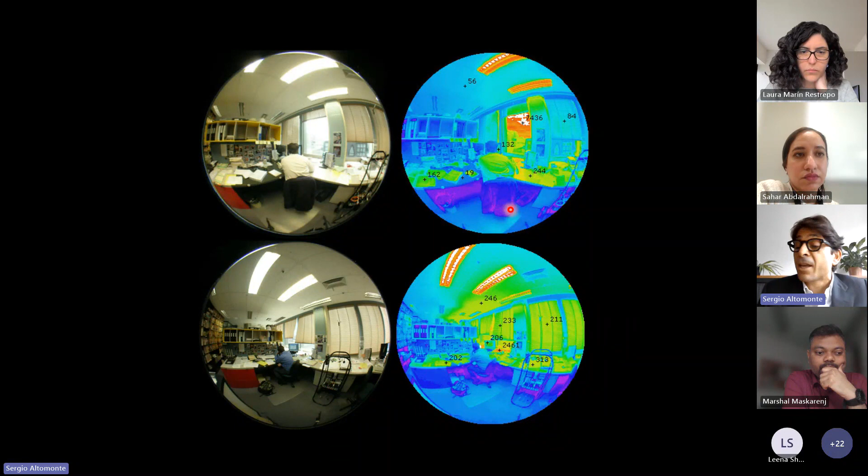So this would contradict all of our models of glare and understanding of potential risks of disability or discomfort. Why is this happening? What is the interaction that is currently in place between the person and the environment that, in a way, is starting to dispute the correctness of our models? So this is a bit of the premise that I want to give to this talk. And later on, I will maybe reveal to you what is happening here and why we think that this phenomenon takes place.

First of all, as I said before, most of us, and I'm sure most of the people attending the lecture today, for years have been discussing the energy versus human nexus. So energy consumption in buildings and how people can actually achieve comfort in buildings while still keeping an eye on their energy consumption. We're obviously stating the obvious here. We know that buildings use 40% of the energy of the whole energy package. This information comes from the US DOE in 2011, but it could actually be more recent data, because the percentages are still found to this very day almost everywhere in the world.

The question that we should actually ask ourselves: are buildings actually using energy, or is energy used by people in order to achieve and retrieve or maintain their condition of comfort, satisfaction, health, and well-being? Actually, a publication from Janda of 2011, the same year of this infographic, says buildings don't use energy, people do. So the question that we should ask is why people use that energy and how those four different levels of human experience, comfort, satisfaction, health, and well-being, can effectively be maintained.

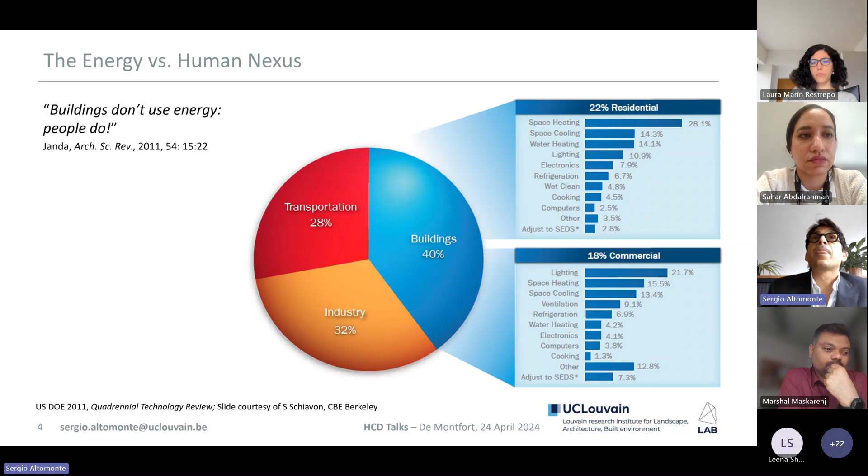So in the field of our research, we often talk about indoor environmental qualities. And indoor environmental quality, based on the US Institute of Occupational Safety and Health, is the quality of a building's environment in relation to the health and well-being of those who occupy the space within it. Essentially, if we look at the general building layout, the acoustic quality, the air quality, the maintenance, thermal comfort, lighting, and so forth, we should be able to control the conditions present inside the building in order to guarantee what? The comfort, satisfaction, health, and well-being of people.

And for this, we have a number of standards resulting from a number of different research endeavors from everywhere in the world. But is it actually happening? If we keep indoor environmental qualities responding to the requirements of the standards, can we guarantee the health and the well-being of people inside spaces?

Actually, recent research, and I'm here referring to the Indoor Generation research by Velux, tells a bit of the contrary. If we look at what staying indoors actually implies today, we have significant evidence that tells us that staying indoors is not at all actually healthy. And this is due to a number of reasons, but also due to the fact that people differ in needs, preferences, behaviors, scenarios, and situations, while standards tend to be somehow regulated based on mean distributions.

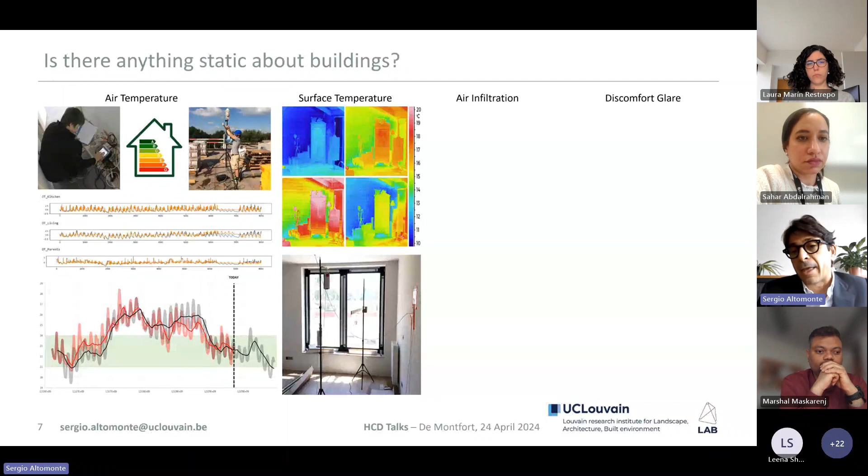Most often in research, we refer to buildings in a rather static way. We look at the buildings and we look at the number of factors that intervene within the building. But is there anything static about buildings? If we look, for example, at fluctuations in air temperature, or at differences in surface temperature that, for example, could come due to sudden presence of sun irradiation on a window, or at the phenomenon of air infiltration due to differences in pressures or to wind presence, or, for example, at the phenomenon of discomfort glare, to which I was referring at the beginning of this presentation, we can definitely see that there is nothing static about buildings.

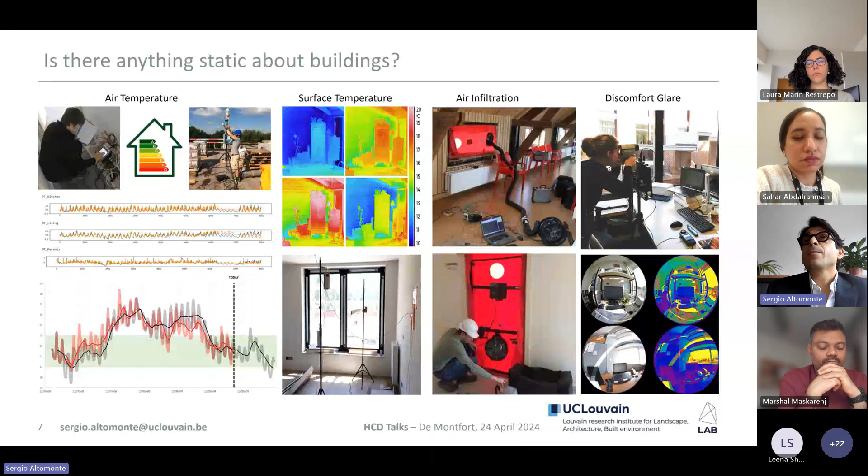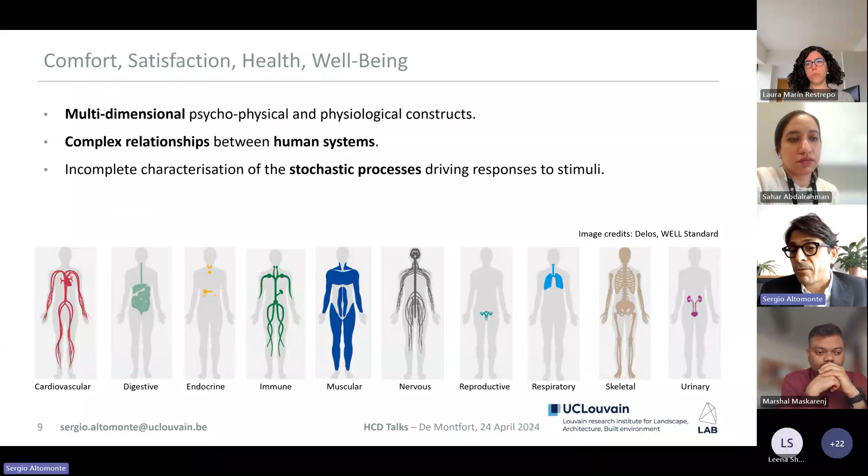In order to address comfort, satisfaction, health, and well-being, we have to disentangle the complex relationship between different human systems, but also accept the fact that we still have incomplete characterization of the stochastic processes that drive response to environmental stimuli. So this is a bit of the questioning that we have been asking ourselves for, I would say, the last 10 years. And I've had the chance of working with a number of scholars of international level in this first publication that we did in 2020. This was done just before the outburst of the COVID-19 pandemic, where we started questioning what is well-being in the built environment. From all this work, a number of hypotheses were formulated.

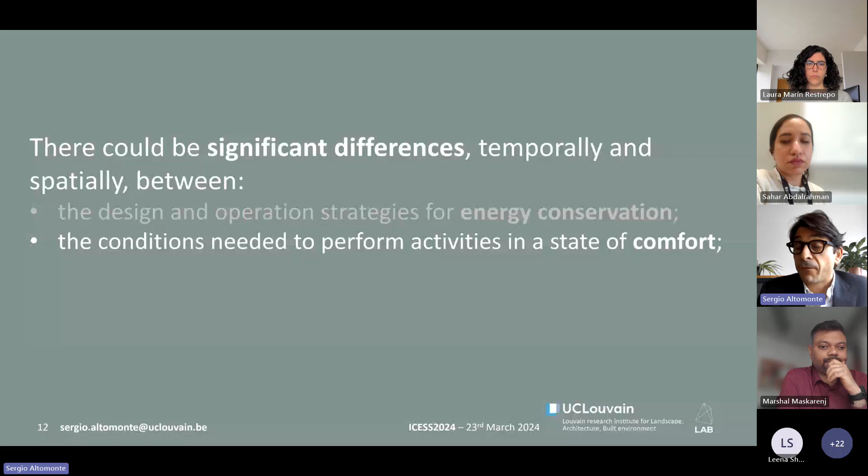First of all, the hypothesis that we try to address in our research is that there could be significant differences at the temporal and spatial scale between the design and operation strategies for energy conservation, so the energy issue in buildings, the conditions that are needed to perform activities in a state of comfort, what contributes to satisfaction with the indoor environment, what occupants need to be healthy, and the settings that are conducive to feeling well over time.

Essentially, this hypothesis means that the strategies that we utilize at building and room level in order to save energy may sometimes be in contradiction with the strategies that we would put in place in order to achieve comfort, to guarantee satisfaction with the environment, to look after the health of people, and to make them feel well. On the other hand, another hypothesis that we put forward in our research is that various environmental stimuli may interact or compete at different spatiotemporal resolutions to affect perception and outcomes of comfort, satisfaction, health, and well-being, driving user responses and environmental behaviors.

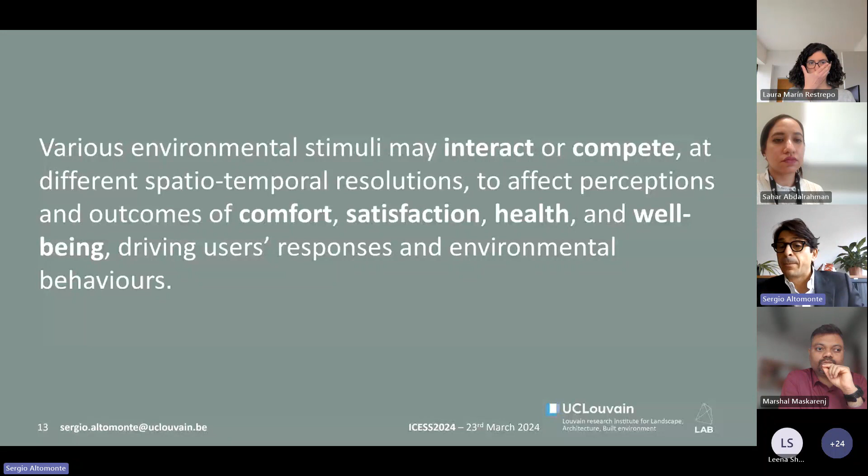In our research, we tend to be somehow secluded in silos. We have specialists in thermal environment, specialists in lighting, specialists in acoustics, but it's not that often that we look at the synergistic or antagonistic combination of those stimuli. Well, actually, if we look at the way in which we experience buildings, multiple sensory modalities that encode the properties of an environment are not processed independently, but actually interact with each other. We may not perceive the thermal environment at the same time as the visual environment, since our brain may actually dissect those experiences, but the sensation comes at the same time.

So the sensations, which are a relatively straightforward activity of the sensory system, are interacting with each other. It is then our brain that perceives, in a process that involves the person, the mind, and experience, and then moves on to the following step of cognition in order to enhance decision and judgment. So this is also a process that we need to look at particularly carefully from a neural level, in the way in which our behavior is driven by the interpretation that we give to the multisensory modalities to which we are exposed. And in this, we reiterate what we said before.

People are all different, and people are different from each other, in this case, inter-individual differences, but are also different from themselves. I may have a different perception with respect to the same sensation at different times of the day, or in different seasons, or in different conditions.

So there comes the understanding that in an office building, particularly if it is, like in this case, an open space or a shared space, people will always and ineluctably have different opinions in terms of their perception of the environment. We said we're looking at comfort, satisfaction, health, and well-being, and I'm sure that everybody, if asked, could give a very clear definition of what they conceive as comfort, satisfaction, health, and well-being, very often referring to standards. But if we look at the definition given by standards, even in this case, we can find some a bit weird contradictions. So, for example, if we ask what is comfort and what is satisfaction, and what is the difference between comfort and satisfaction?

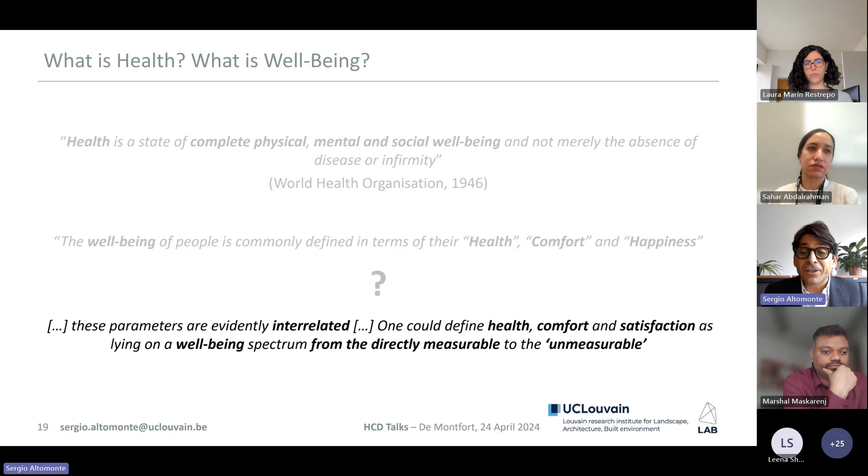These are the questions that we asked ourselves when starting to elaborate a conceptual model that could somehow try to disentangle the intricate connotations of these four constructs. A paper was published recently in Building and Environment that I co-authored with Seda Kaçel, that I mentioned at the beginning of this presentation, Paulina Wegertseder Martinez and Dusan Licina from the EPFL, and it's called, as the title of this presentation, What is Next? A New Conceptual Model for Comfort, Satisfaction, Well-being in Buildings.

But already we're putting ourselves in a specific moment in time, and we are feeling something that changes the way in which we perceive the environment around us. So we can say that the transient and subjective evaluation of the momentarily resolved perception deriving from the multisensory integration of concurrent environmental exposure be defined as comfort.

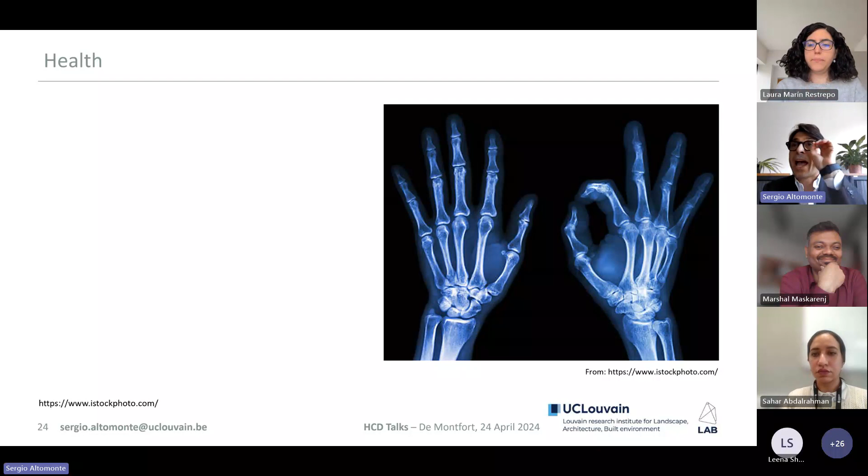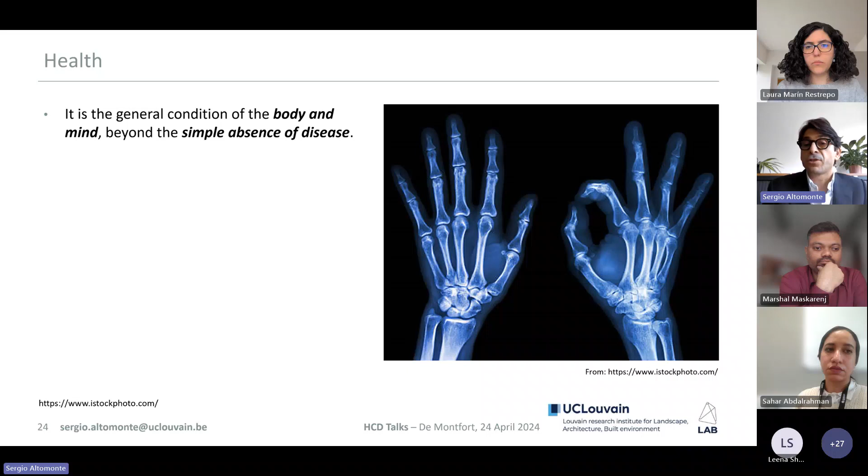Let's look at this, X-rays. So in this case, obviously, we have a picture, a snapshot of the state of health of a person, but it's a general condition of the body and the mind that is beyond the simple absence of disease. So it's something that may go back to the history of exposures. It entails optimal functioning of the body, so it's not only a physical state, but also peace of mind, confidence, and social connection. It's dynamic and it's temporary.

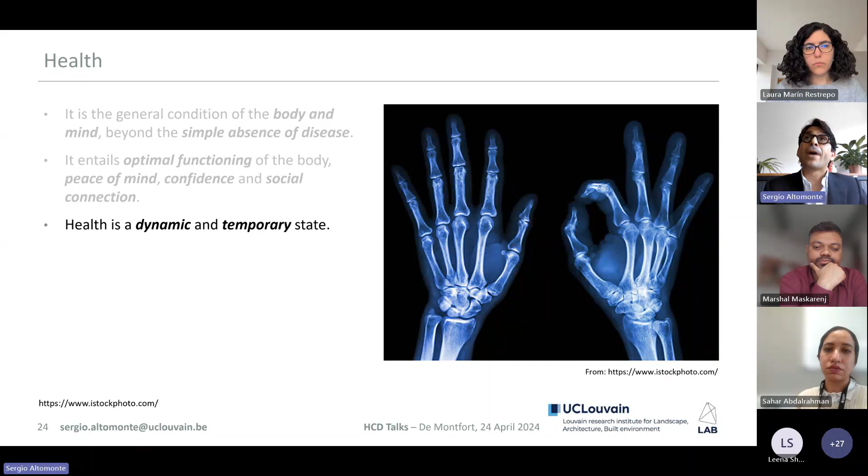The X-ray is taken now, so obviously it may change in the future, but still it looks like something that takes into account all of my history of previous exposure. It is to be evaluated in a transient moment in time and space, right here and right now, but the breadth of experience that influences my state of health is obviously much broader than what characterizes comfort.

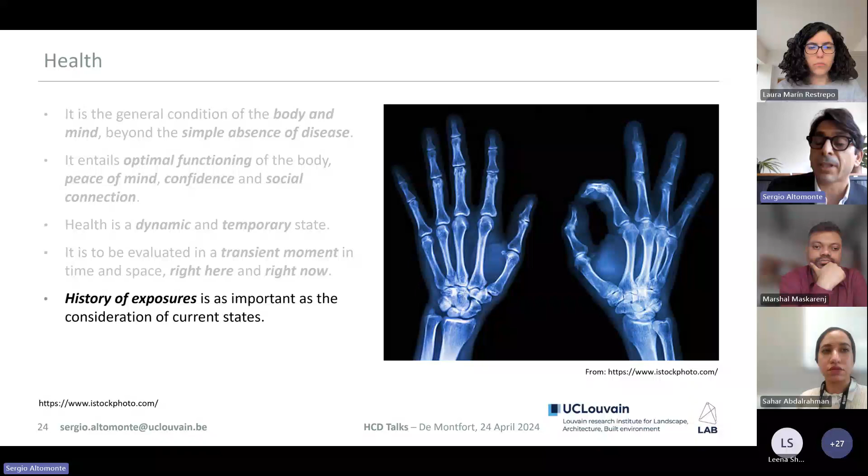It implies health and comfort, as Stevens had said in the definition, but also is projected towards quality of life. It's multidimensional. It is physical, functional, social, and mental, but also it entails a combination of flourishing and thriving. It entails moods and it entails emotion. Well-being is something that encompasses satisfaction with life, happiness and pleasant affect, but something that is sustained over time.

So even if comfort, satisfaction, health, and well-being are very often used almost interchangeably in research and practice, they imply different constructs. And we have tried to put them together in a graphical format with this model that we called NEXT. So why NEXT, first of all? Well, if we look at the number of dimensions, we can call this N. If we look at the experience and expectations of people, we could call them EX. And if we look at the dimension of time, we could call it T. So the combination of N, EX, and T gives us the NEXT model.

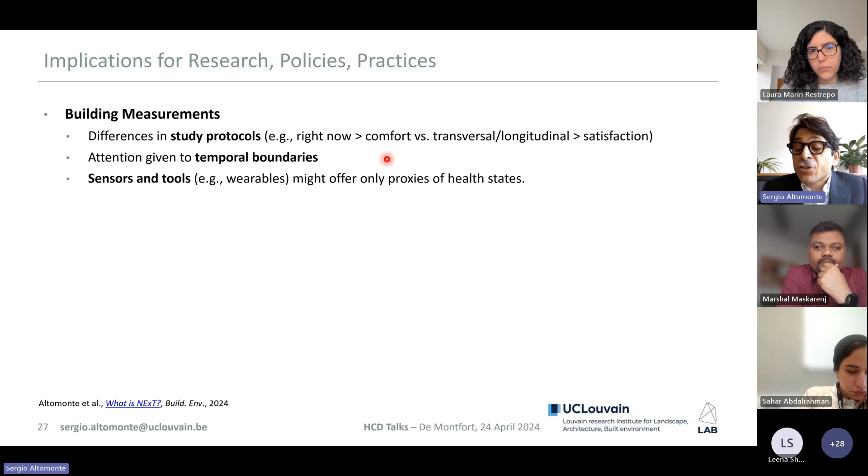So this is the model that we put forward, and we anticipate that it could have significant impacts in terms of building measurements. So, for example, difference in study protocols: you would measure comfort with right here, right now surveys, while rather satisfaction with a transversal or longitudinal survey. We have to give attention to temporal boundaries. What are we asking of people? And of course, we may need to include sensors and tools to measure the different states that can be referred to the different constructs. There's also a difference that this model may have in benchmarking.

So building strategies need to be less prescriptive and allow for adaptability, depending on whether we want to prioritize comfort, satisfaction, health, and well-being, but also we have to address the diversity of building users and types and functions of buildings. We have to encompass different spatio-temporal resolutions, and we have to allow dynamic fluctuations in the way in which we contextualize the experience of buildings.

Also, design criteria may need to radically change. I'm stating this with a lot of caution, but comfort may not be a prerequisite of satisfaction and health. Actually, in some cases, a slight deviance from comfort, so a slight discomfort, may be more beneficial to satisfaction and health than staying within the boundaries that are set by standards. A temporary drift from the comfort zone, as has been said already several times in the scientific literature, may actually be satisfactory and may be healthy.

We may actually induce a stimulus to our body that may be healthy for our endocrinal production, for example. On the other hand, if we focus on dynamic and variable human outcomes, so if we let our buildings drift outside of narrow zones of control, we may also induce very significant energy savings. So I would stop here. I just wanted to give a very general overview of the way in which we deal with the construct of comfort, satisfaction, health, and well-being.

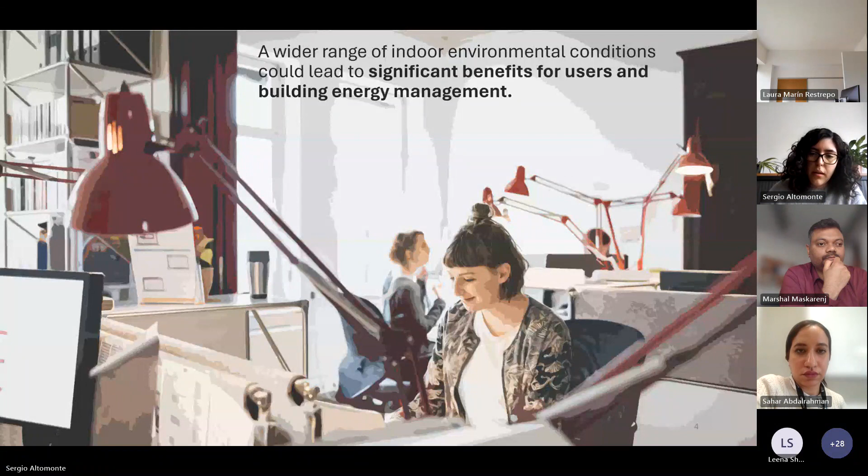So this research is part of my ongoing postdoctoral project, investigating the relationship between human comfort, environmental conditions, and social dynamics to redefine these traditional indoor environmental standards with an occupant-centric approach. So today I will share this conceptual framework about tolerance and how individuals perceive and respond, and how we are developing this research. And by examining these aspects, we aim to offer some insights that challenge and extend this traditional way that we

saw the standards. So let's first explore a bit the concept of tolerance, which refers to the extent to which individuals can endure uncomfortable conditions before feeling compelled to take an action. And this tolerance is not just about the physical sensation of discomfort, but also involves psychological and social dimensions that affect our behavior in shared spaces.

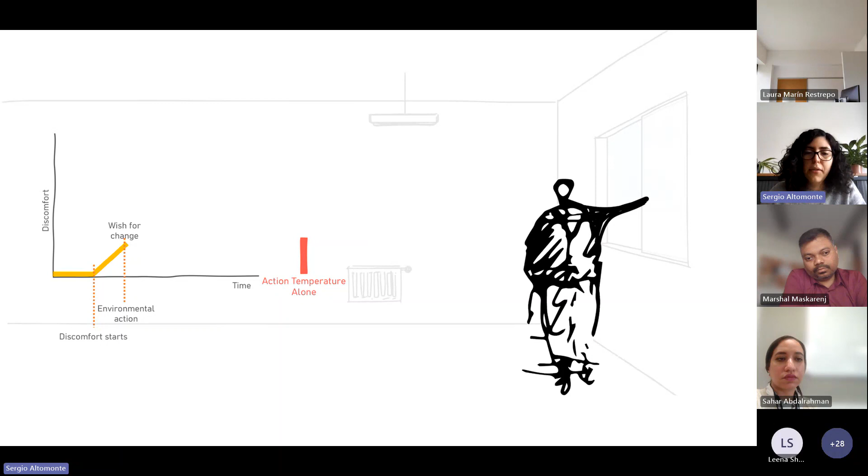Imagine that you are alone in a room where the temperature is steadily rising, increasing your level of discomfort. You might decide to open a window to alleviate this discomfort, thereby directly modifying your environment to regain that comfort. However, these dynamics change significantly when we share the space with others. Here, social norms, work expectations, or even personal reluctance might prevent the immediate action, leading to a delayed response.

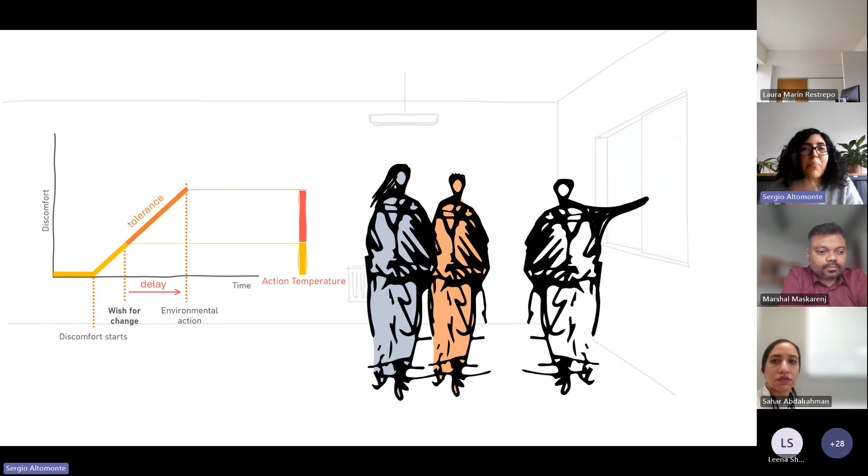And this delay creates a gap between the desire to act and the actual action, exposing you to temperatures that you find uncomfortable and would not choose if you were alone. So the decision to endure these conditions rather than change them marks the beginning of tolerance. But how much can you withstand? We hypothesize that there's a limit to this endurance, and eventually discomfort becomes unbearable, prompting environmental action.

And this is what leads us to define what we call the tolerance zone, marked by two critical boundaries. The inner one is the threshold at which discomfort becomes noticeable and the initial desire for change emerges. But due to various factors, such as social norms, as we mentioned before, the actions may not be taken. And the outer boundary represents the limit of tolerance, of endurance, beyond which the individual feels an urgent need to alter their environment to restore comfort. And this boundary is crucial as it marks the transition from enduring to acting.

The intensity and duration of the discomfort, your physical state, your psychological makeup, and the prevailing social context can all influence this tolerance threshold. How annoying the conditions feel to you, what activities you need to perform, how long you have been enduring it, your mood, the presence of others. There's a lot of things that can shape the tolerance.

Understanding these boundaries is crucial to highlight the dynamic nature of human interaction with their environment and how individual perception is connected with collective behavior. They challenge the static assumptions of traditional environmental standards and suggest a more fluid, adaptable approach to building design and management. So this exploration forms the core of my project, which seeks to understand the boundaries of tolerance to discomfort in office environments, and how these are influenced by social dynamics, personal preference, and physical setting.

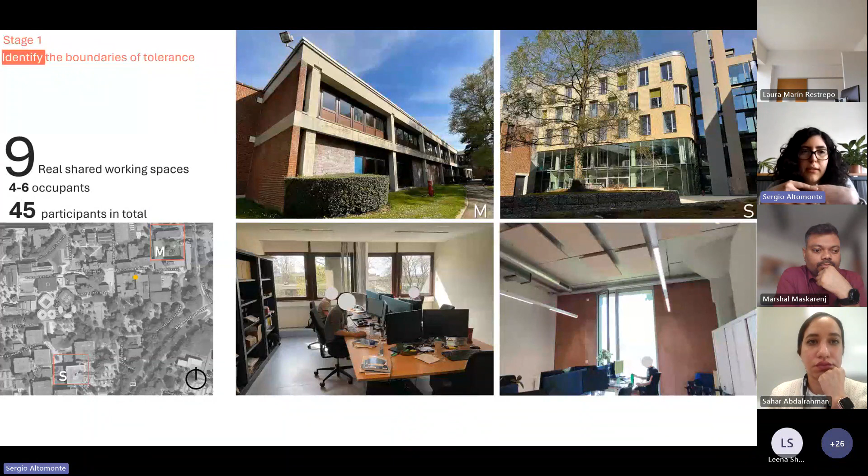In the initial stage, we monitored 9 shared office spaces at UCLouvain, involving 45 participants in total. Over the course of several months, we gathered both objective and subjective data to gain a comprehensive understanding of the daily interactions with the office environment. So we recorded all the indoor and outdoor environmental conditions, monitored the time when the occupants interact with the windows, with the blinds, with all the control elements, and complemented this information with right-here-right-now questionnaires to assess comfort level, tolerance, task performance, and actions related to the environment.

We also did some interviews and focus groups to understand the motivation and social dynamics between the groups of people that we were studying. And we are currently analyzing this data to compare it with the standards and evaluate the conditions where occupants were tolerating this discomfort. And this stage provides us with a rich data set that not only revealed how occupants typically respond to discomfort, but also highlights the thresholds that we are looking for.

And building on these preliminary findings, the second stage was conducted in the Aachen Workspace Simulation Lab. We had 28 participants in total, and the experiments were designed to assess the impact of temperature change and elapsed time on physiological, perceptual, and behavioral responses, and also how some contextual factors, as personality traits, for instance, or sounds, or the level of task engagement could also affect the way people respond to these conditions.

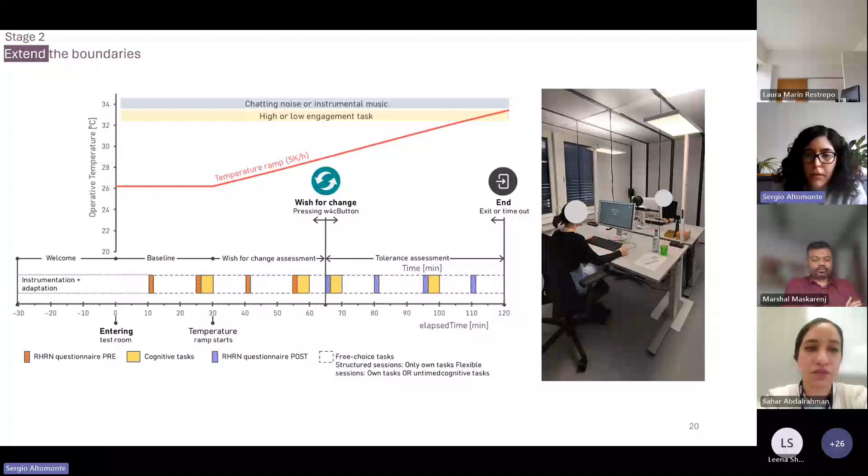And finally, the third stage of our research is currently ongoing, and we are using all this information to develop some recommendations for building design, use, and operation. We are now analyzing this data set to try to understand these behavioral, perceptual, and psychological responses, to synthesize these findings into practical guidelines that can help to expand this range of indoor environmental conditions, and help to enhance occupant comfort and the energy efficiency of buildings.

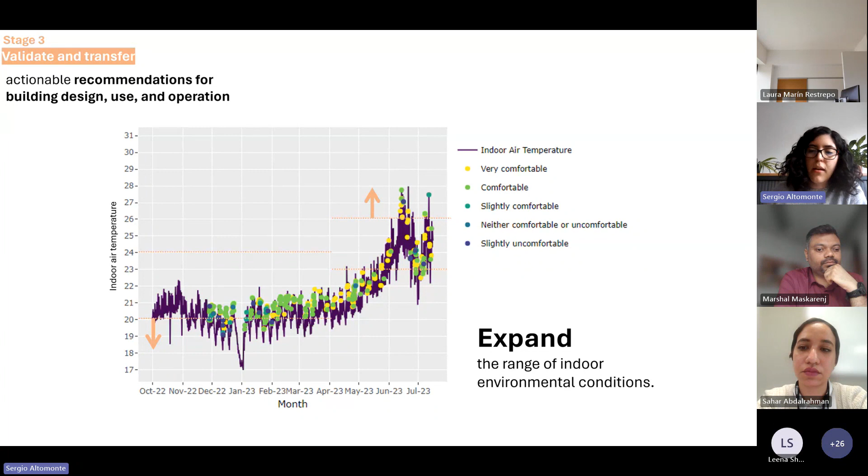So our research into environmental tolerance not only deepens our understanding of how people interact with their environments, but also challenges current standards for building comfort. By studying discomfort, we are learning, as Sergio mentioned, that experiencing it temporarily can actually improve health and lead to greater long-term satisfaction and well-being. And this is not about advocating for discomfort, but rather acknowledging its occasional benefits and leveraging it to drive improvements in building design and operation, leading to spaces that are truly tailored to human needs.

So this paradigm shift in the environmental standards for buildings, moving towards dynamic and adaptive designs that truly prioritize the diverse needs and well-being of occupants, aligns directly with the approaches that Sergio was mentioning, and also with the theme of this talk. So just emphasizing the need for a more nuanced, occupant-centered approach in the design and management of indoor built environments.

So thank you all. I'll let Marshal go. Thank you, Laura. Okay, so we move to the third presentation, which is there. Okay, and you should see it. There we are. Thank you, Laura. Thank you, Sergio.

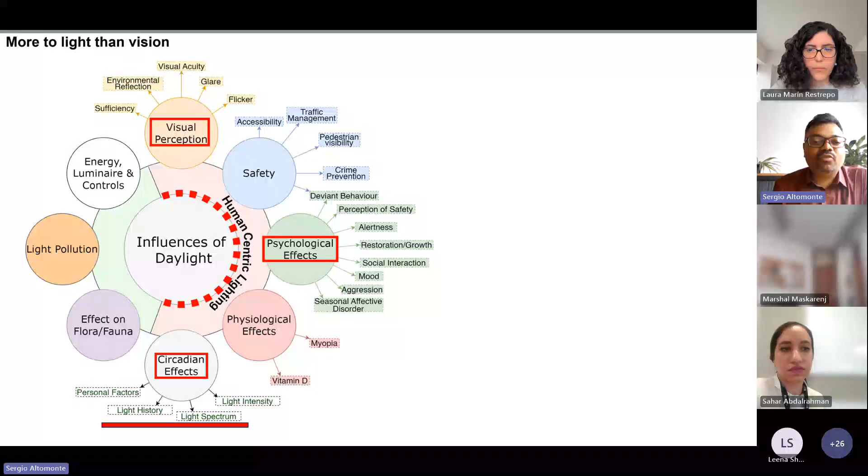Design of indoor spaces must consider these other aspects as well, and simulation is one of the good ways of doing pre-design performance evaluation. However, most lighting simulation tools focus only on the aspect of vision. There are some that consider the aspect of spectra as well, and can evaluate the performance of design based on recommendations for spectral light exposure. We are developing OWL, one of the tools that can evaluate aspects beyond vision via simulation. This aspect is called the non-visual aspect. I'd like to give a little bit of background on what is the non-image forming effect of light.

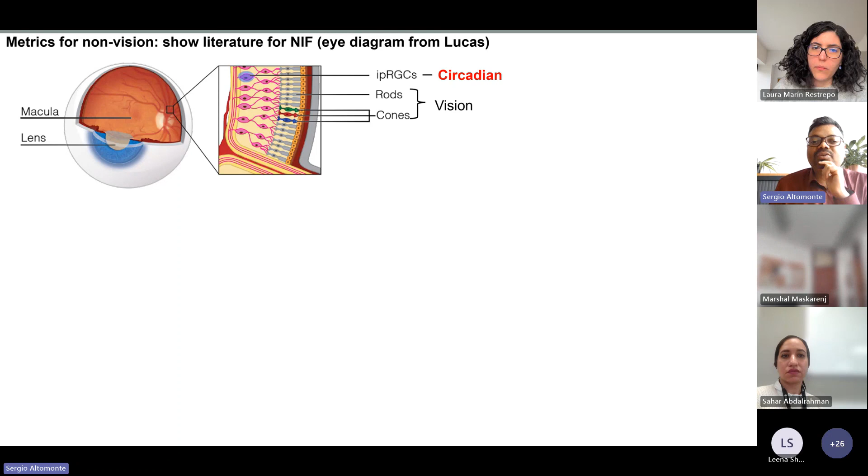Within the human eye, a new category of photoreceptor has recently been found that directly connects to the part of the brain that regulates the circadian rhythm. This photoreceptor, called the intrinsically photosensitive retinal ganglion cell, the ipRGC, thus acts as a time giver when it is triggered. And it tells our body when it thinks morning happens or evening happens. All the body processes therefore get synchronized to this photoreceptor's trigger. But what triggers this photoreceptor? It's actually a certain frequency of light.

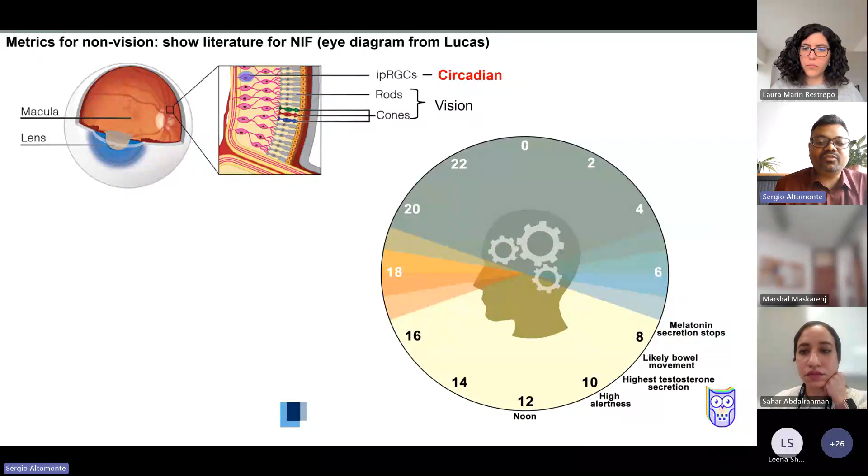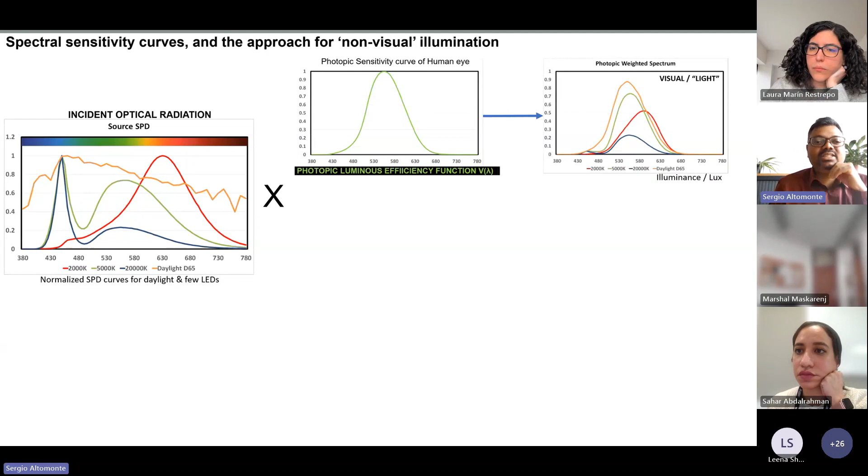When we are exposed to any light source of a varying spectral composition, the light that we actually see is regulated by the sensitivity of the vision sensors in the eye, which are mostly the cone cells. But there is also this non-visual sensitivity, which is different from the visual sensitivity. This is the circadian sensitivity. And when we multiply the wavelength with the sensitivity function, and we sum the area under the curve, it provides us the photopic or the melanopic illumination.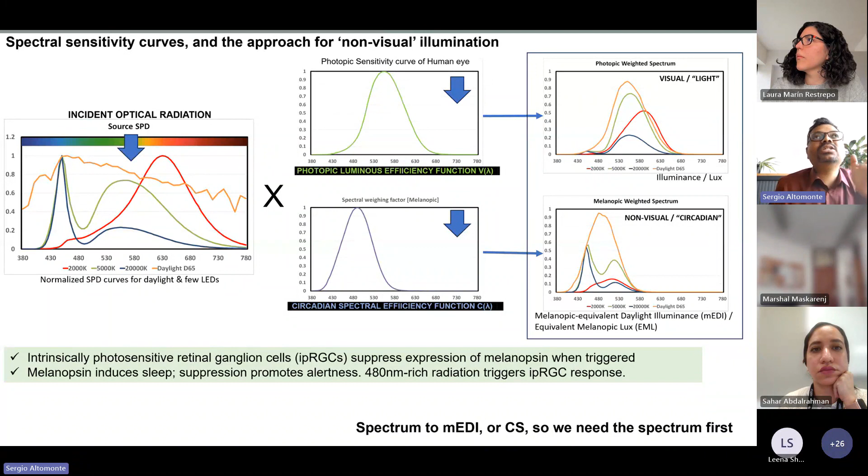Now in this diagram, what we are seeing is 4 different types of incident radiations, 4 different spectral qualities, and the response of the visual sensors and the activation of the circadian sensors is different, and it is what influences the final outcome. So the ganglion cell therefore gets triggered based on the amount of signature that it receives, and it suppresses the expression of melanopsin. Since melanopsin is the night hormone, its suppression makes us feel alert.

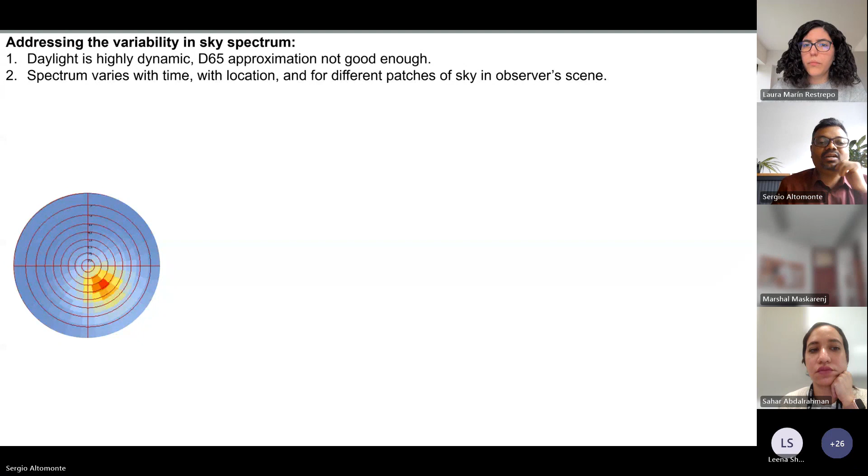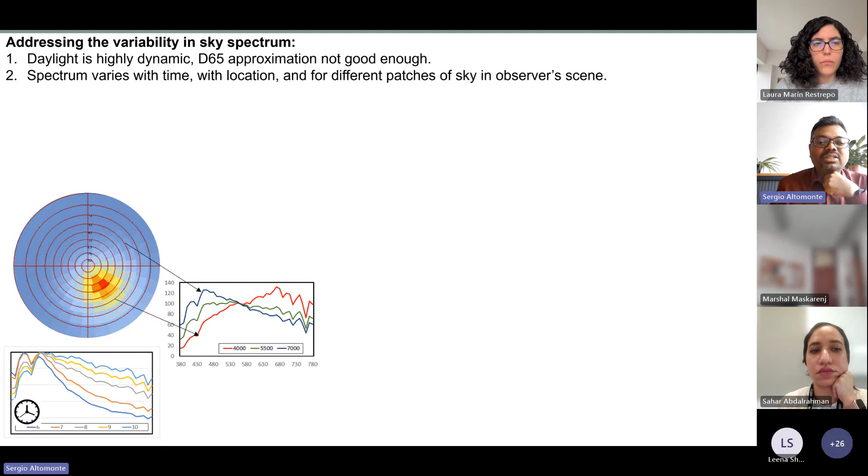For a simulation software to evaluate the visual and non-visual aspect, one very important requirement is to know the spectral quality of the source, which is daylight. But knowing the spectral quality of daylight is a tough challenge. It varies by the different position of the sky at any point in time. It also varies for the different hours of the day and of the year. Now for the OWL tool, we have used the spectral sky models that were developed at TU Berlin. And these models use the luminance to CCT to SPD conversion approach.

And a combination of these models with the Radiance engine allows us to evaluate the incident spectra at the observer's eye. So we multiply the spectra that we evaluate at an observer's eye with the photopic and the melanopic sensitivity functions. And therefore we identify the visual and non-visual illumination at any given point in time from any observer's location. So this is what we came up with: a first tool called OWL, Occupant Wellbeing Through Lighting. And this is what the dashboard does.

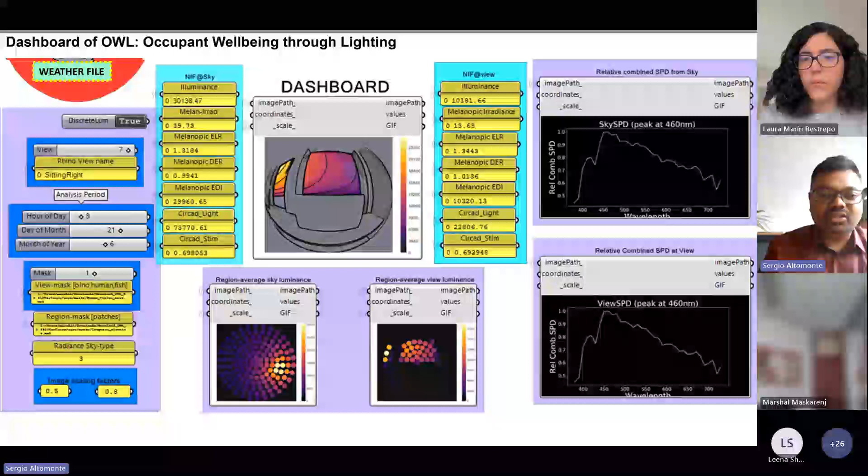So it's a Grasshopper based open source tool where a user can change, for example, the weather file. So you can change the location. Just define the weather file, for example, for Brussels or London or whatever. You can change the geometry and the material of the scene. So you can define what the building looks like, what the material of the building is. You can define where the camera is placed. You can define the time of the analysis period, like which hour of which day of which month, and you can also define the view mask.

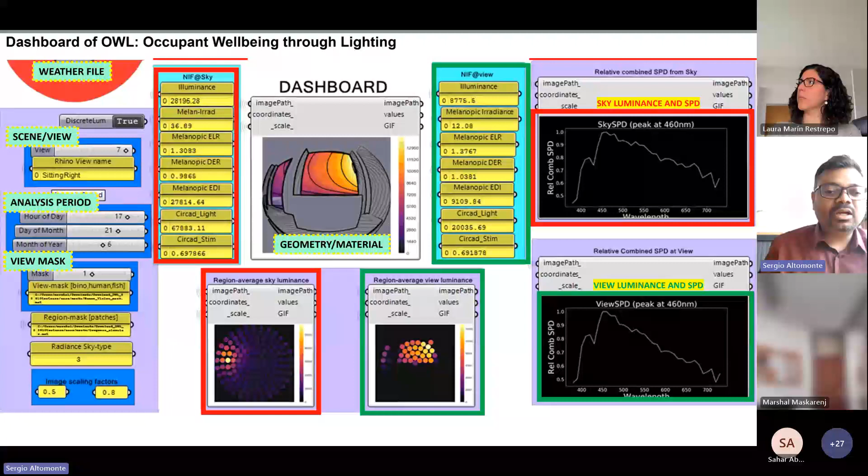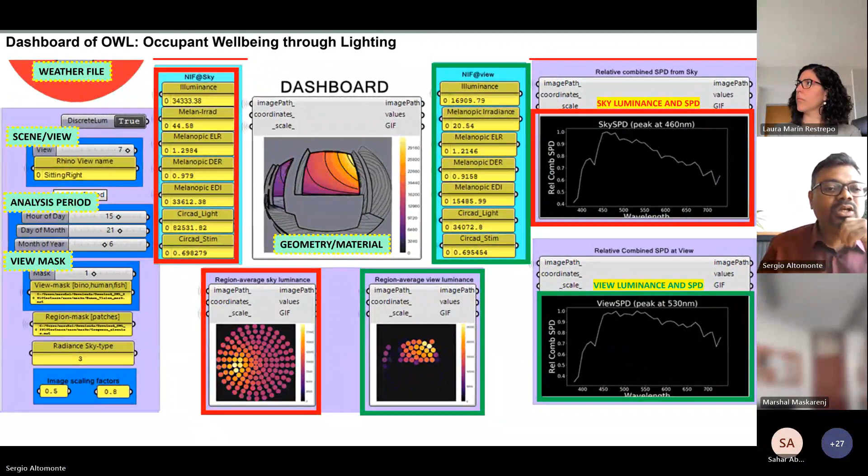Now the dependent variables, that means what does this software calculate? It can tell you the sky luminance distribution, which is the luminance distribution of spectra under the sky. It tells you the combined SPD of the sky, and it tells you various metrics which are visual and non-visual, both under the sky dome and as well as at the observer's viewing scene. Now this approach can help us evaluate the performance needed for, such as the WELL Building Standard criteria, and it can be a pre-design alternative to required post-occupancy measurement and evaluation.

However, a holistic design evaluation needs more than a point-in-time, point-in-space performance. This was a limitation of our first OWL tool, and we therefore set out to address this challenge. Our second tool, called AnnuOWL, is capable of Radiance-based evaluation over the grid. It is supported by spectral sky models and has a similar design philosophy. Key points that must be highlighted here are that evaluations are simultaneously conducted over the grid for space-centered lighting metrics. And for occupant-centered metrics, the evaluations are conducted for 4 vertical and 1 horizontal orientation for each occupied position.

So what you're seeing here, it doesn't matter. What you see for each occupied position is the visual and non-visual metrics. And these evaluations are done simultaneously for the entire year. That means for all the 8,760 hours.

If you need to point, I'll show you how to do it. Yeah, you go there. Perfect. You go to laser pointer, and then you can point.

So one of the evaluations that you see here are the evaluations over the grid, the flashy stuff. But all those dots you're seeing are the infographic that I'm talking about. And for anyone to comprehend such a massive amount of raw data would be crazy. So we developed a novel infographic that processes the data and tells the designer the performance of the design using graded metrics, the metrics of comfort, satisfaction, energy performance, and user well-being using color codes.

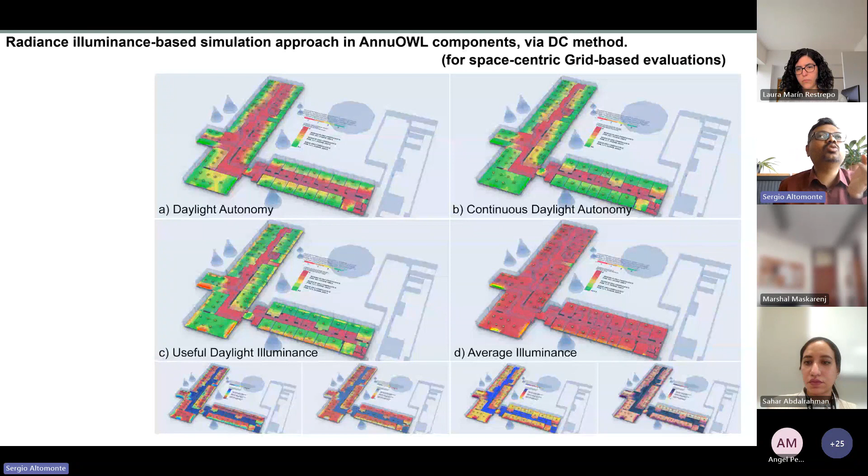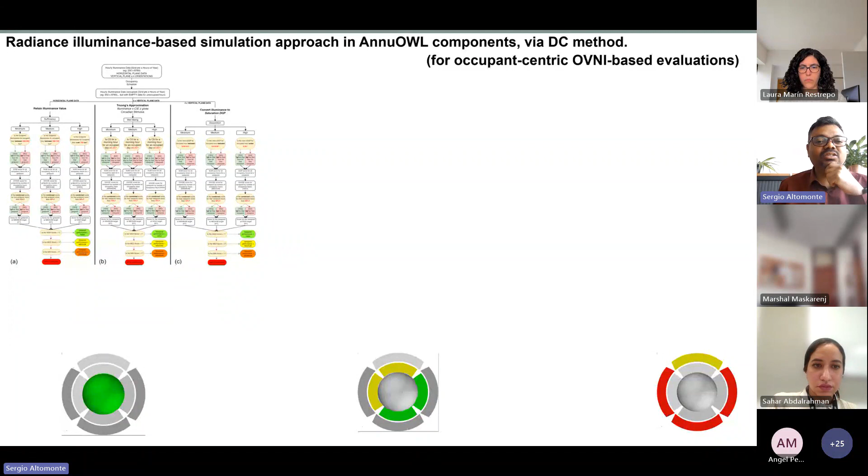For space-centered grid-based metrics, AnnuOWL can evaluate daylight autonomy, continuous daylight autonomy, useful daylight illuminance, and average illuminance. Since Climate Studio and Ladybug can also do these evaluations, it's not our most important contribution. Where we actually shine is the novel evaluation methodology for calculating metrics for energy use, comfort, and well-being for each occupant. We also have a plan for satisfaction via window view, but that is yet to be operational.

For energy use via daylight provision, we use the following logic for evaluating performance, graded as minimum, medium, or high compliance on a horizontal plane, and we show it as a hemisphere for each occupied position, the hemisphere in the middle. For non-visual potential, we use Truong's approximation for evaluating circadian stimulus and the CS design guideline coupled with proposed annual performance criteria to evaluate it for 4 vertical viewing angles for each occupied position. We display this with the first ring, again as high, medium, minimum, or non-compliant.

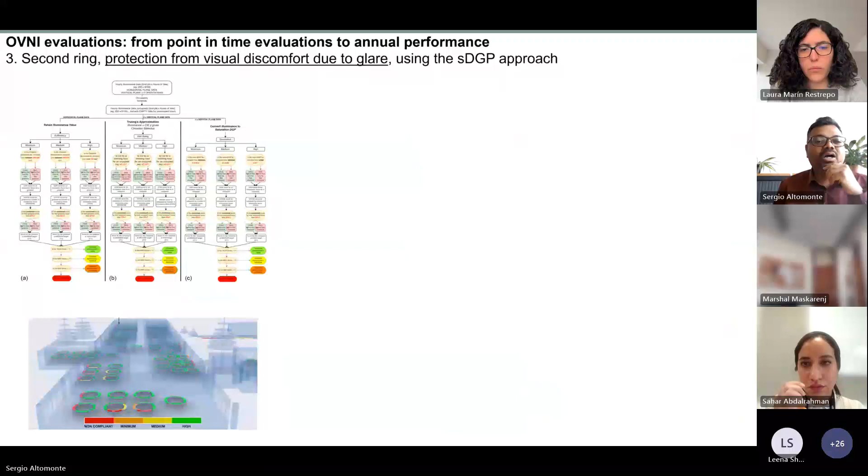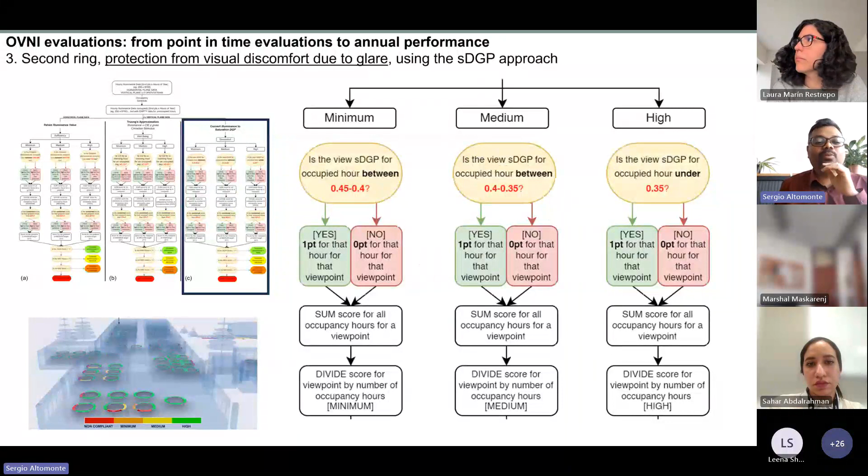I'm sorry I had to rush through this a little fast, but it's okay.

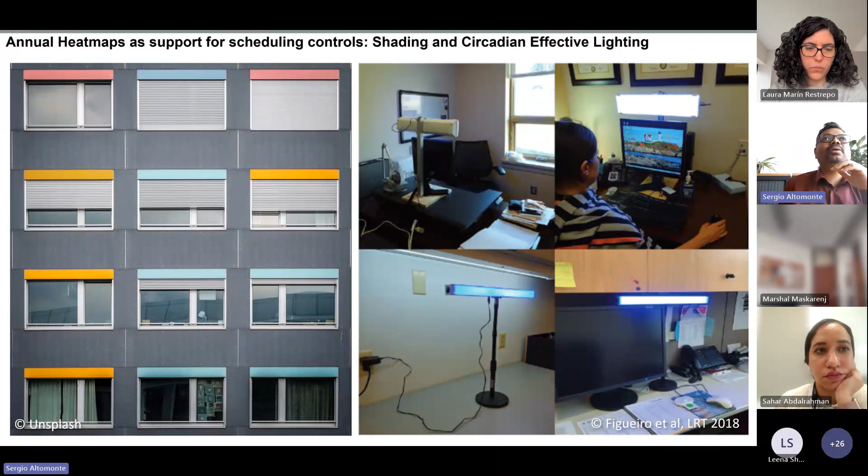Annual OVNI can also be used to evaluate annual heat maps of performance, both for hourly circadian stimulus and hourly simplified DGP, as instantaneous indicators of circadian stimulus and discomfort glare evident to any occupant for all annual hours across all 4 orientations. These can be used to create strategies for operating shading elements, such as window blinds, with focus on occupant comfort for any hour with high DGP, and for turning on circadian effective lighting to provide the occupant the needed stimulus if any position lacks it.

So effectively, our annual can be considered a first attempt to incorporate the next model for lighting simulations, where for each occupied position, metrics for well-being, comfort, and satisfaction can be evaluated and demonstrated via the OVNI rings. And the hemisphere at the center presents the energy performance via lighting design.